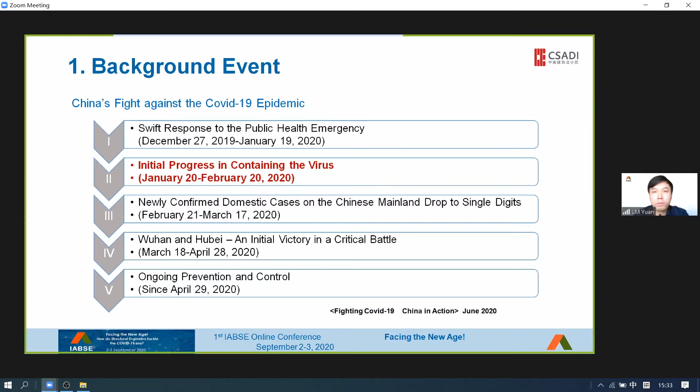The COVID-19 epidemic was first manifested in Wuhan. So where is the first city to build an emergency hospital in China? Since the outbreak of COVID-19, the number of newly infected people in Wuhan increased sharply from January 21st, and Wuhan closed the city urgently on January 23rd. At that moment, Wuhan's medical system was facing pressure to improve the reception and treatment capacity. Wuhan decided to replicate Beijing Xiaotangshan Hospital of 2003 and build emergency infectious disease hospitals, namely Huoshenshan and Leishenshan Hospital.

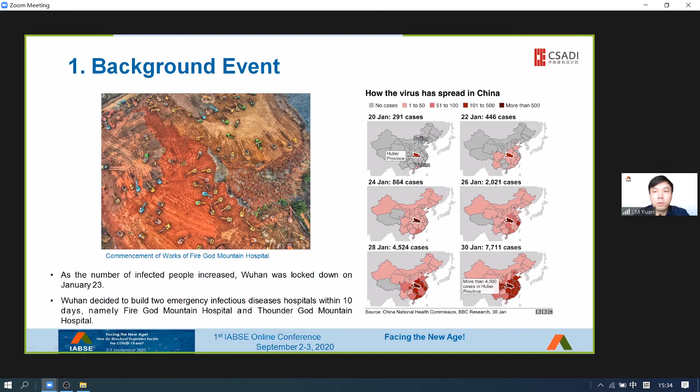On February 3rd, 2020, Wuhan Epidemic Prevention and Control Headquarters decided to implement the policy of patient classification. A total of 3 different lines of defense are deployed. The first line of defense refers to the hotels and schools that are mainly used for accommodating isolated people. The second line refers to makeshift hospitals that are mainly used for receiving and treating patients with mild symptoms. The third line refers to the temporary emergency hospitals and designated hospitals that are mainly used for receiving and treating patients with serious symptoms.

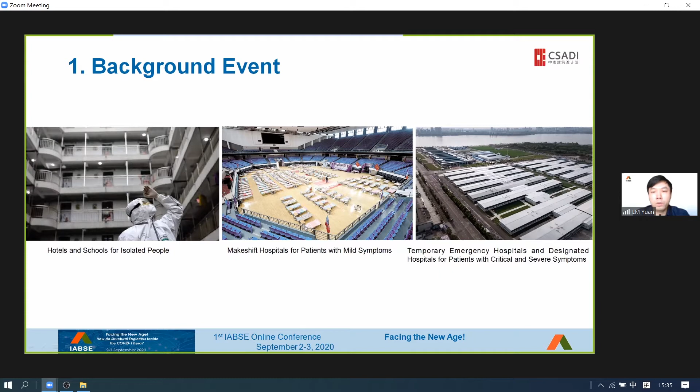With the spread of COVID-19, a large number of emergency hospitals have been built, transformed, or expanded all over the country. It's difficult to count the number of hospitals completely, but these hospitals can basically be divided into 3 categories. The first category is the temporary emergency infectious disease hospital, featuring lightweight and modular assembly. First of all, you can see the picture. Wuhan has 2 famous temporary emergency hospitals, Huoshenshan Hospital and Leishenshan Hospital, replicating the design concept of Beijing's Xiaotangshan Hospital in 2003. These 2 hospitals adopted the unitized layout and modular structure.

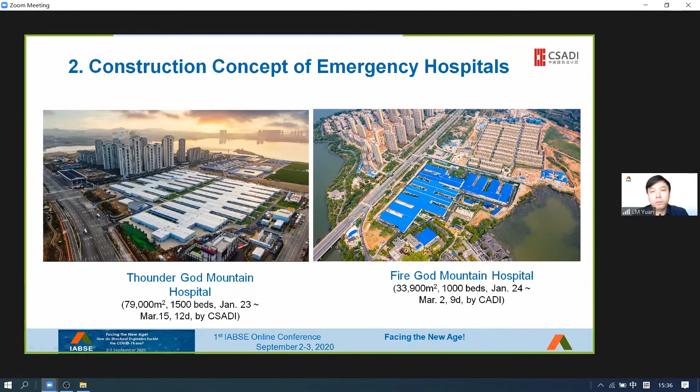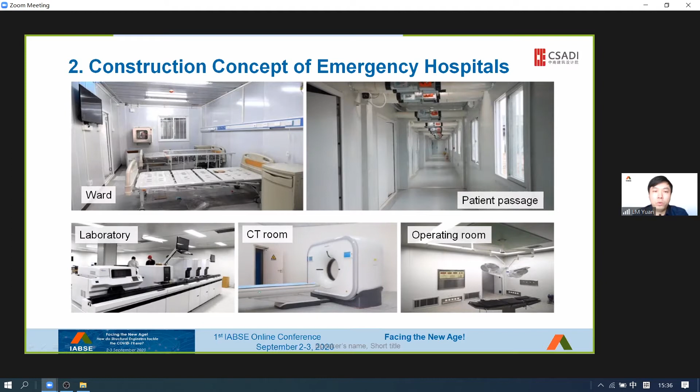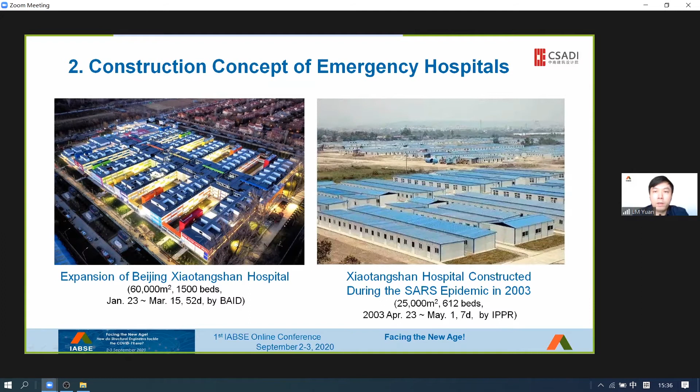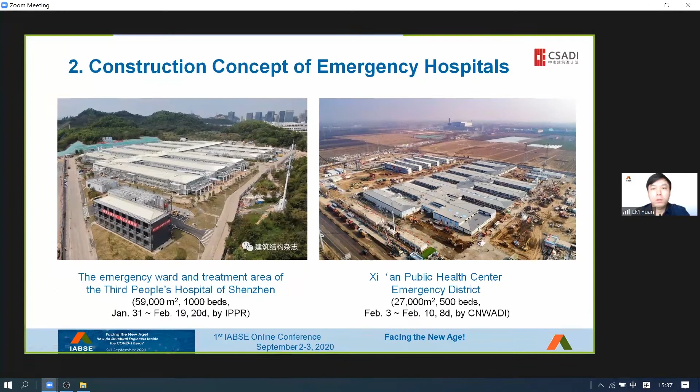These are the facilities inside the emergency hospital. We can see the ward, patient passage, laboratory, CT room, and operating room. This is the emergency hospital built on the original site of Beijing Xiaotangshan Hospital. Compared with the original conditions in 2003, we can find that great progress had been made. These are the cases from Shenzhen and Xi'an, and we can see that their forms and layouts are similar to those in Wuhan. In the process of design and construction, design institutes across the country have proposed a relatively unified layout and structure form through cooperation and exchange.

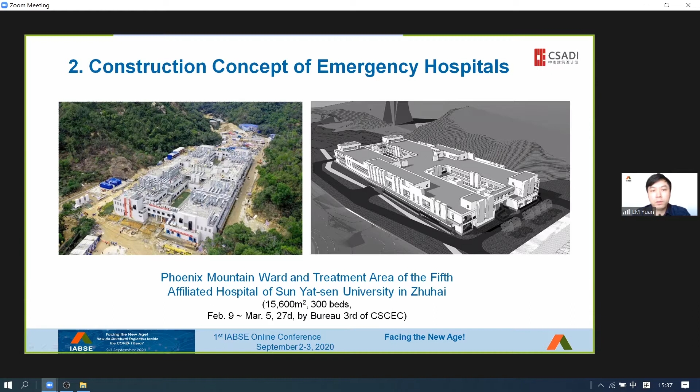Two special cases are worth mentioning. One case is that the emergency hospital in Zhuhai adopted the reinforced concrete structure for the first time. The main structure was completed in 9 days. It can be used permanently and withstand typhoons. The other one is the highly integrated container-based modular system for infectious disease hospitals. It is developed by BSB and can be built into a high-rise building and used for a long time. Its factory fabrication takes a little longer time, but the field installation is very fast.

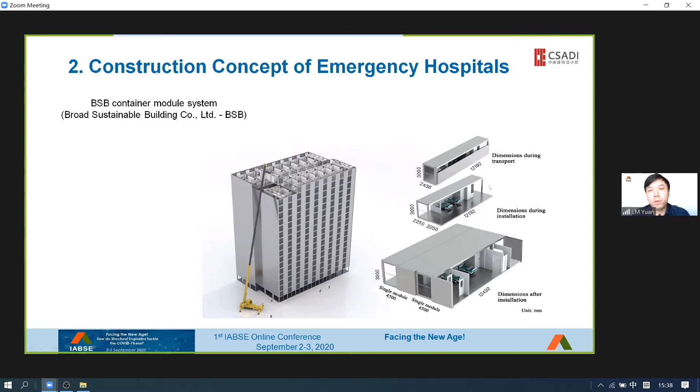The second category is the makeshift hospital, which is also known as the Fangcang shelter hospital. In response to COVID-19, China adopted the makeshift hospital for the first time. It is a large temporary hospital to separate patients with mild symptoms from their families and communities, and provide medical care, disease detection, accommodation, and social activities. It can receive and treat a large number of patients during the peak period of the epidemic, make full use of existing buildings, and transform them into temporary treatment places in the shortest time and at the lowest cost.

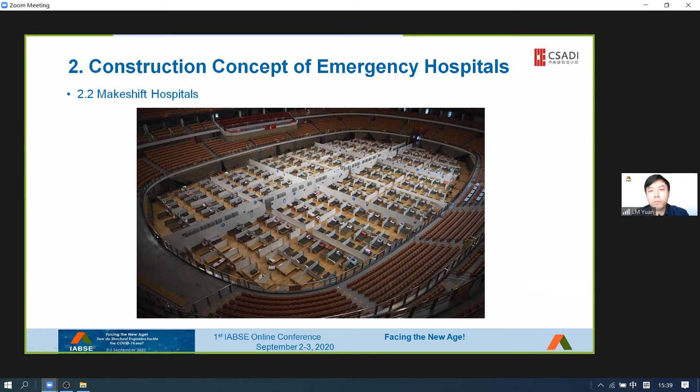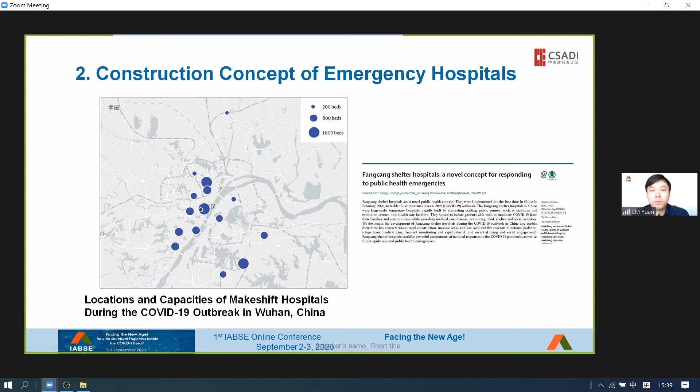This is the distribution map of some makeshift hospitals in Wuhan. The circle size is proportional to the number of hospital beds in each makeshift hospital. This diagram shows the changes of bed capacity and occupancy rates of the makeshift hospitals over time. Since February 18th, that is 12 days after the first makeshift hospital in Wuhan began to accept patients, the number of confirmed cases in Wuhan has steadily declined. So the makeshift hospital is a major reason for China's successful control of the epidemic.

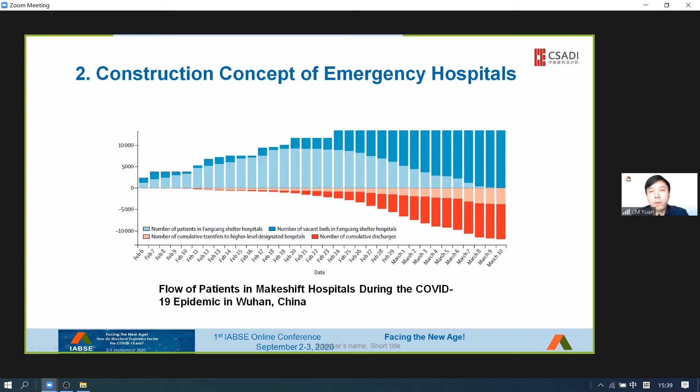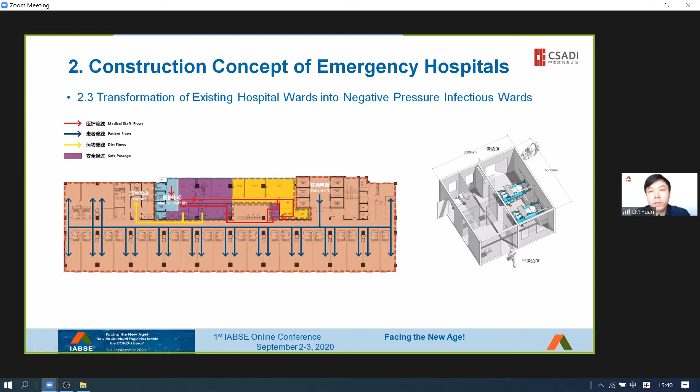In addition, the third category is the transformation of existing hospital wards. The general wards are transformed into negative pressure wards. The flow organization is adjusted, and the clean areas are separated from contaminated areas. This transformation should be completed quickly with the least change.

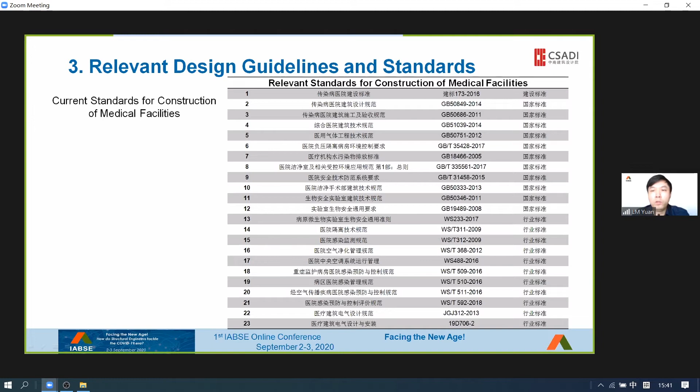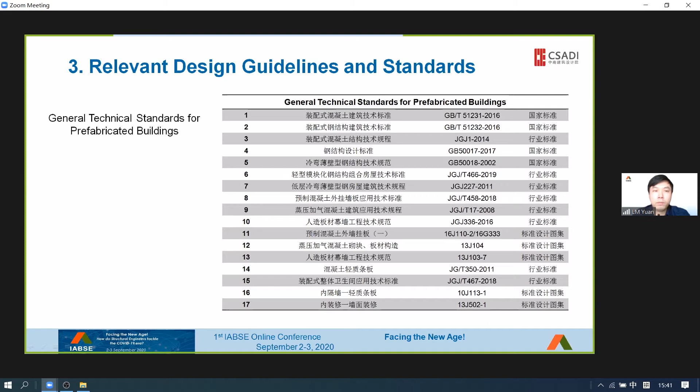Temporary emergency hospitals are suitable for prefabricated light steel structure, which makes full use of the standardization, modularization, and integration of prefabricated buildings to meet the requirements on rapid construction under the emergency. All the above are relevant specifications and standards.

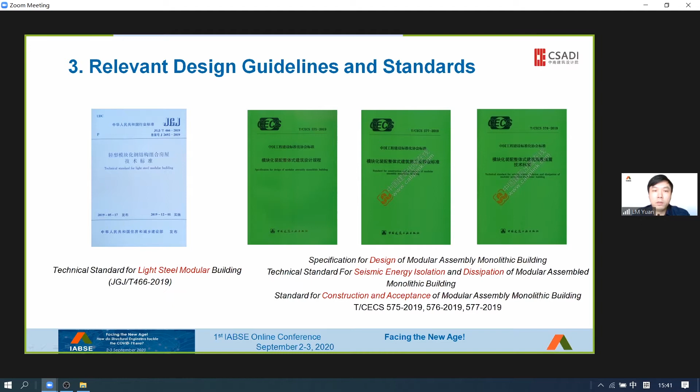During the COVID-19 epidemic, there are also many new technologies summarized, and the following standards were released at the early stage and have guiding significance. First, the design guidelines for emergency treatment facilities of novel coronavirus pneumonia, which is applicable to the reconstruction, expansion, and construction of medical facilities, and specifies construction principles and requirements of site selection, architectural design, structure, E&M, operating and maintenance.

Second, the design standard of infectious disease emergency medical facilities for novel coronavirus pneumonia, which is also applicable to the design of reconstruction, expansion, and construction. Third, the guidelines for design of temporary hospital for infectious disease, which is based on practical experience from the construction of Huoshenshan Hospital and Leishenshan Hospital.

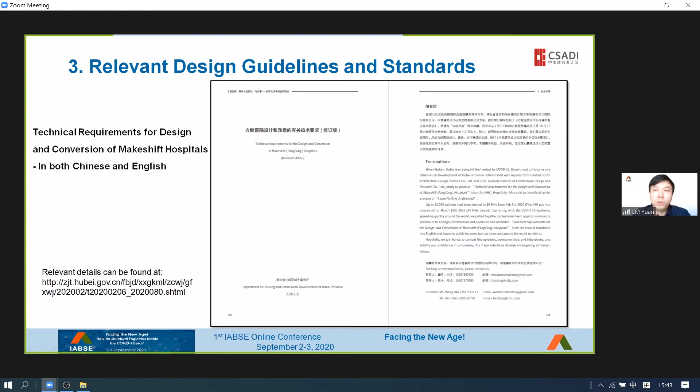Then, the technical requirements for converting hotel buildings into temporary hospitals, and the technical requirements for design and conversion of makeshift hospitals, which were released to relieve the current epidemic situation as soon as possible. The one about makeshift hospitals was translated into English and published for reference of international counterparts. Now, I will take Leishenshan Hospital as an example to explain the key points in design and construction.

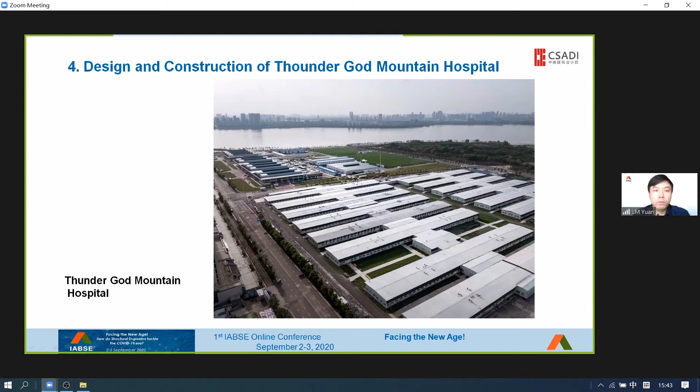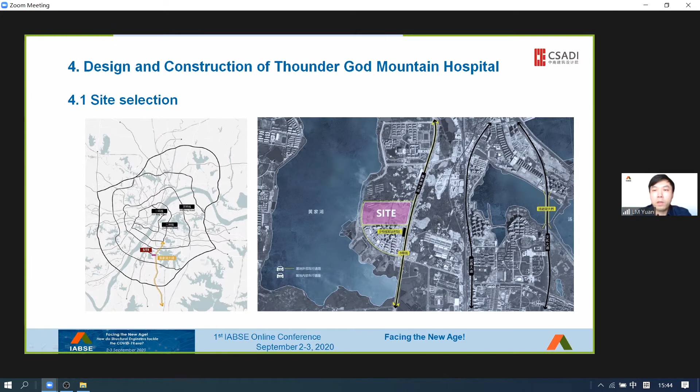First of all, we should ensure the urban environment is safe and the site selection is reasonable. The hospital is located in the south of downtown areas and at the downwind position of the city in winter. In addition, the surrounding area is broad land under development and construction without any residents. Municipal facilities are relatively complete. The site is flat and the ground is hardened, making it suitable for temporary construction. This is the master plan.

The construction land of Leishenshan Hospital covers an area of 220,000 square meters and includes east and west blocks, with a total building area of 79,000 square meters. The core area is an isolation area in the east block, which can accommodate nearly 1,500 patients. The living area for medical staff in the west block can accommodate about 2,300 staff members.

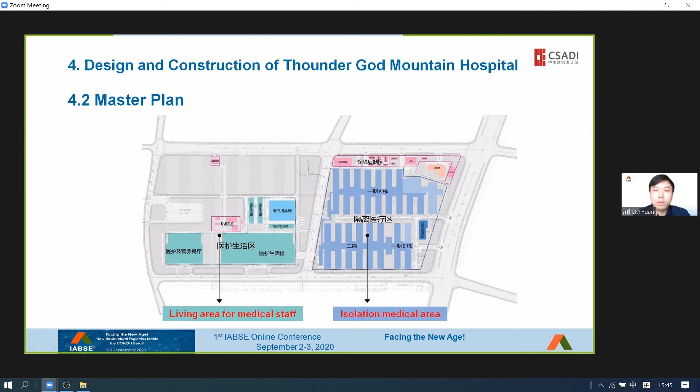This is the typical architectural layout of the isolation area. It adopts the fishbone layout, which can be flexibly adapted to the site. The layout follows the principle of three areas and dual passages for a typical infectious disease hospital. Three areas refers to the clean area, the semi-contaminated area, and the contaminated area, with safe passages provided between different areas to ensure the safety of medical staff.

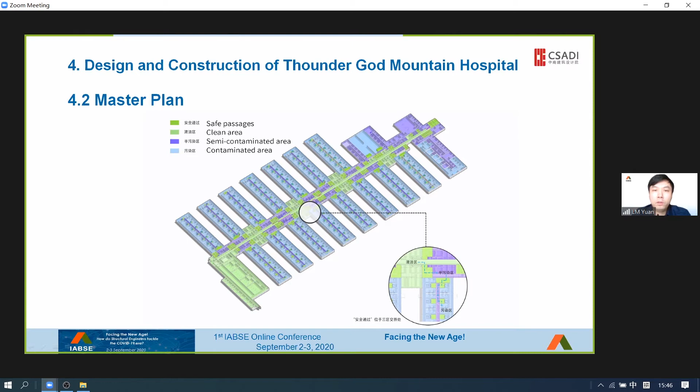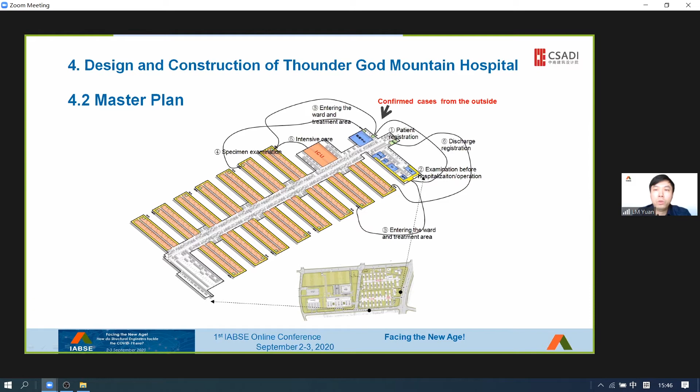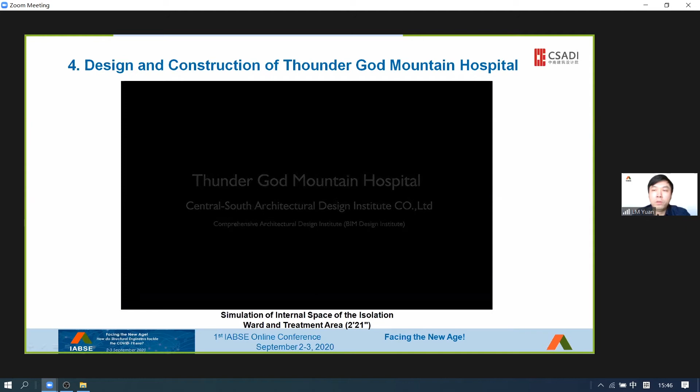Dual passages refer to the patient passage and the medical staff passage. The patients may enter directly from the outside. Each ward and treatment area is relatively independent to prevent cross-infection. Next, I will show you a video of BIM simulation. This video demonstrates the inner space of the ward and the treatment area, and shows the inflow and outflow of medical staff.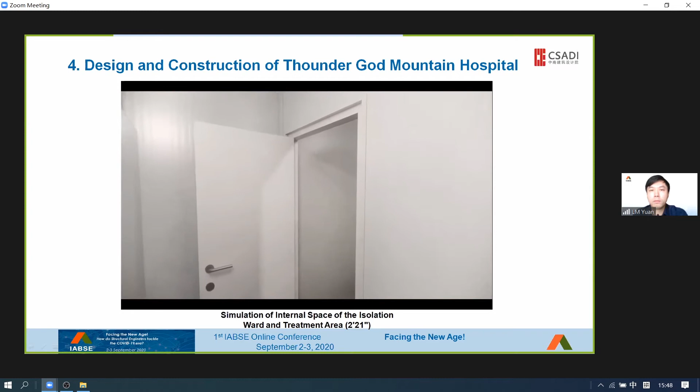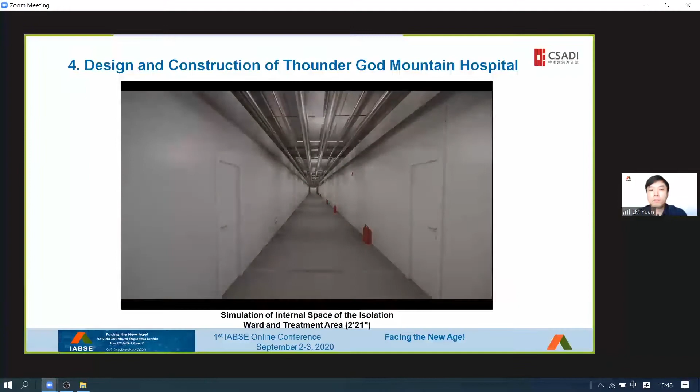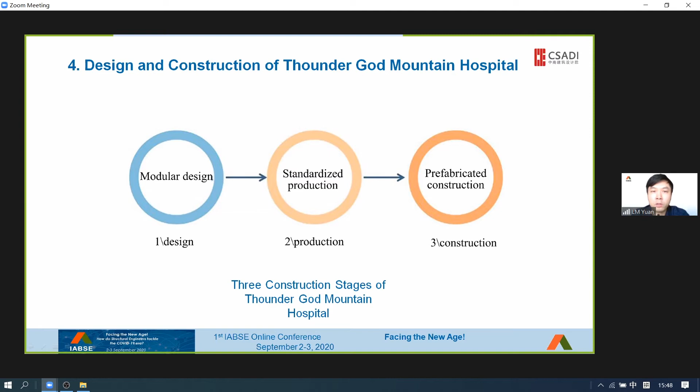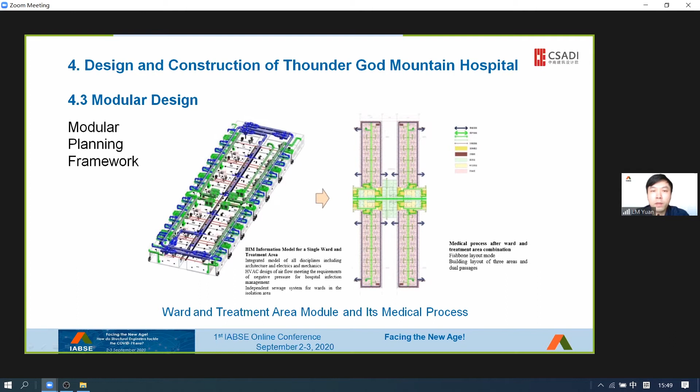Okay. Leishenshan Hospital is constructed in these three stages: the modular design, standard production, and the prefabricated construction. First of all, let's take a look at modular design. The ward module is a major functional area. Each ward module has 50 beds. All ward modules have universal and consistent design. The three basic functional modules are assembled into 30 wards as per unified internal standard.

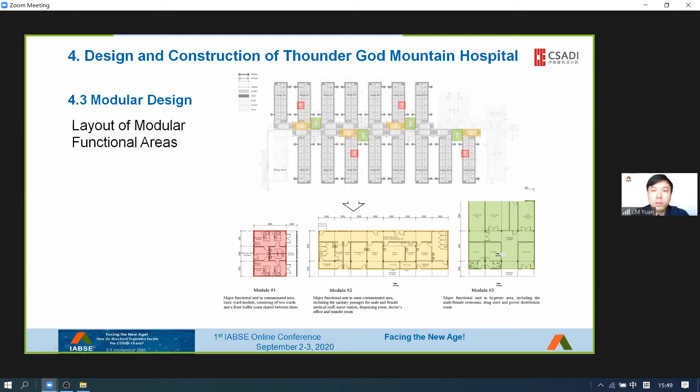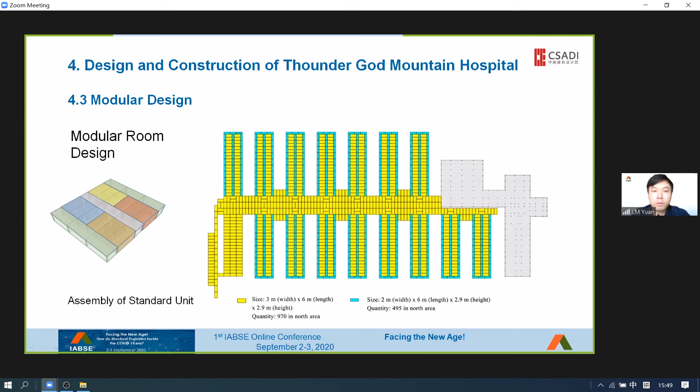To achieve standard production, the whole isolation ward and treatment area is divided into two box-type modules of different size. The yellow ones with a plan size of 3 meters times 6 meters, and the blue ones with a plan size of 2 meters times 6 meters. On the basis of modular design, different parts and components are produced in a standard manner. When workers are treating the ground and burying pipelines on the site, over 10 factories across the country have already started the module fabrication. Most building materials of the hospital are prefabricated in factory. They are all produced in a standard and industrialized manner.

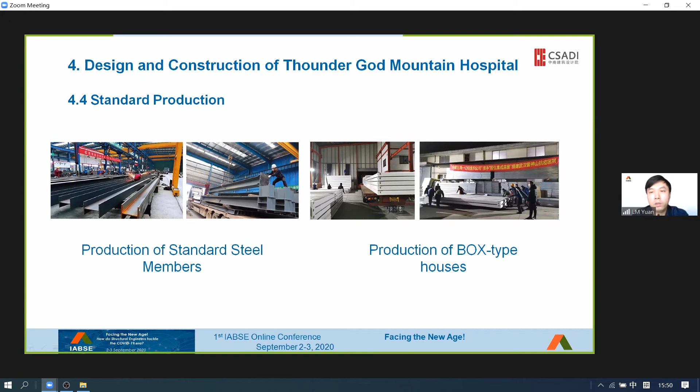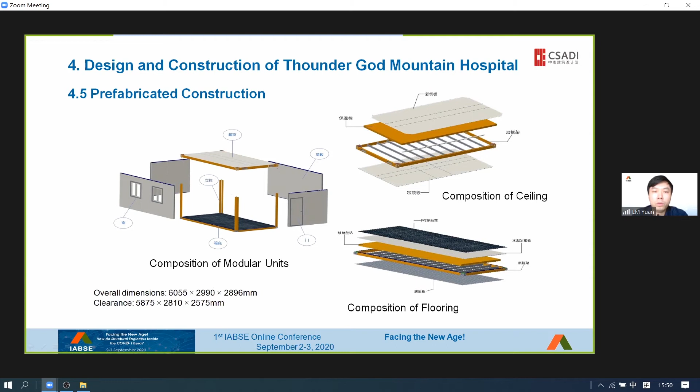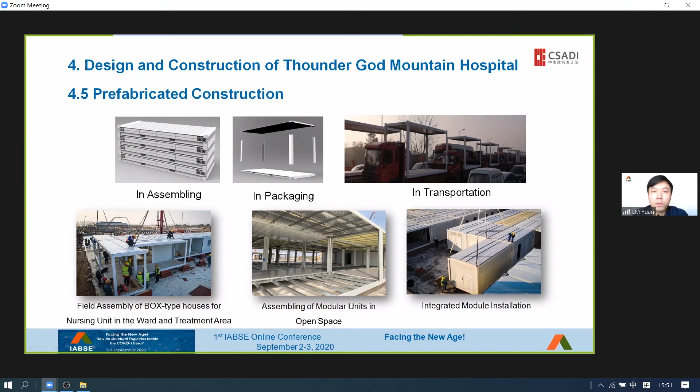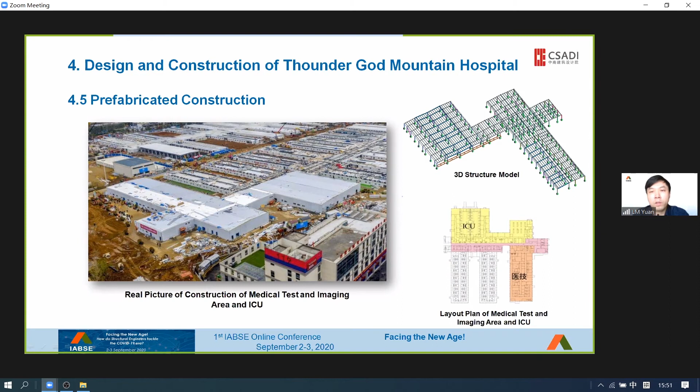The medical technology zone mainly includes ICU, CT room, operating room, and so on. These function rooms need large span and height, and the column grids are not unified. The steel frame structure is used because it's difficult for container house to meet the requirements. In the design process, a detailed model is directly established to facilitate the rapid construction, and the structural checking and the detailed design are carried out at the same time. With this approach, the process from design to drawing is shortened to 24 hours. The steel structural members are cut and fabricated and immediately transported to the site for assembly.

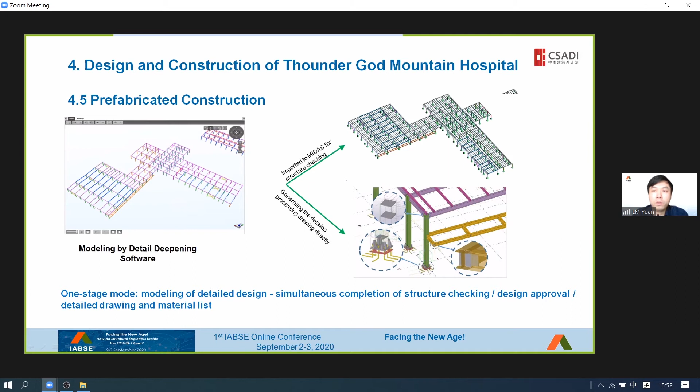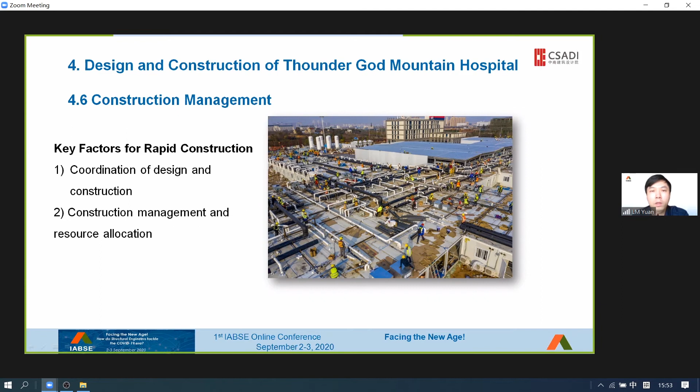Next, I will introduce how to achieve rapid construction from the perspective of construction management. The rapid construction requires two key factors. The first is coordination of design and construction, and the second is construction management and resource allocation.

Good coordination of design and construction requires, first of all, the integrated project management concept, that is to take the EPC mode as a reference and consider design issues from the perspective of construction and procurement. It's necessary to use the existing resources of construction contractors and adopt the existing materials. The design scheme should be proposed on the basis of full awareness of construction conditions and status on the site. If the conditions change and make it hard to implement the original design, the scheme should be timely adjusted.

Secondly, it's necessary to arrange different design processes seamlessly and coordinate with the construction. Thirdly, the well-adapted and flexible structural form should be selected. Moreover, the structural form should be simple, reliable, and convenient for fabrication and installation. In addition, the on-site design and effective communication are also indispensable. The quality and safety risk should also be controlled during the construction and coordinated with the acceptance inspection.

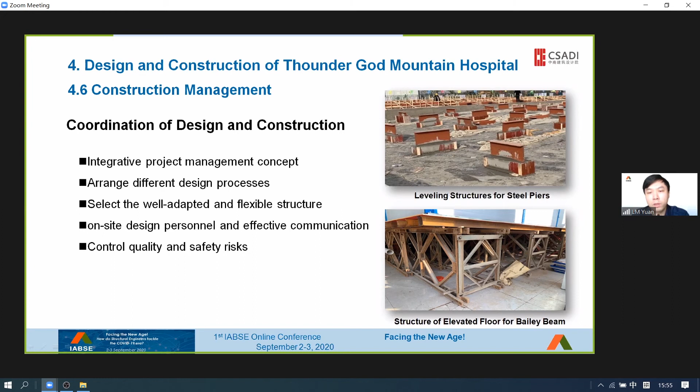The site and foundation are main factors that restrict the construction period. To start construction as soon as possible, the design should utilize the original hardened ground as much as possible. The area lacking hardened ground should be poured with a thick concrete hardened layer and provided with built-in steel mesh. The hardened ground should be integrated into a whole and provided with piers or rafts according to the superstructure. This method can not only solve the problem of crushing for the foundation, but also provide good conditions for laying HDPE waterproof membranes over the whole site.

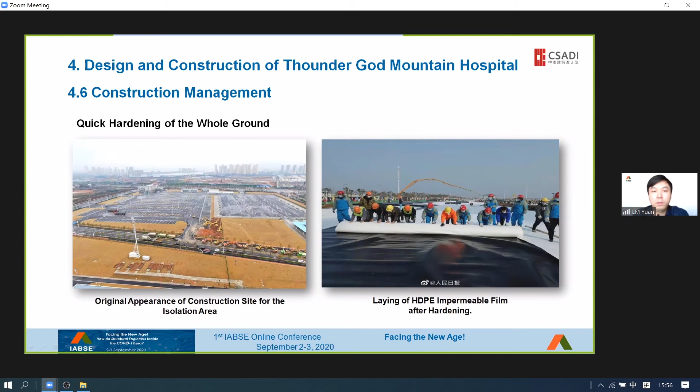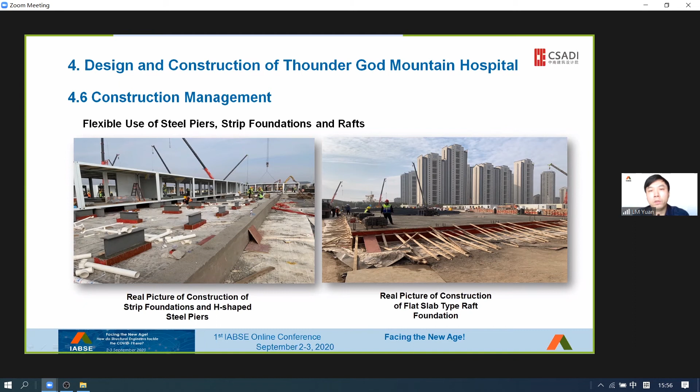The container house is lightweight, and the hardened ground can bear the load from it directly. It's elevated to a certain height by piers to ensure the installation space for drainage pipelines. Meanwhile, rafts should be adopted in the steel frame area. We can find from the figure that strip-shaped concrete piers are arranged along the outside of the buildings to support the superstructure and block the backfilling soil. And H-shaped steel piers are used inside.

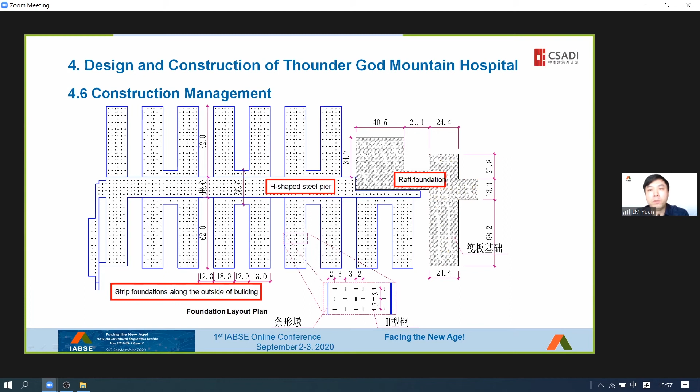There are 5 difficulties to overcome about construction management. First, to cope with the limited construction period, it is necessary to formulate a detailed implementation plan and improve the management, increase inputs of labor, materials, and equipment, and arrange working procedures reasonably. As for quality control, the on-site personnel should be arranged at any time to enhance the quality management. It's also important to decompose the quality objectives and guide the workers with samples.

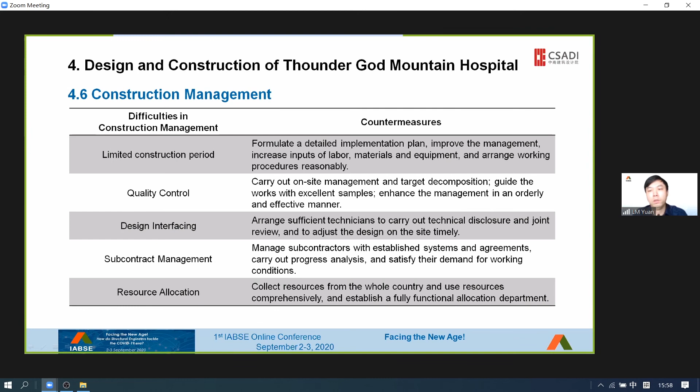Third, be equipped with sufficient construction technicians to improve the design, conduct the technical review, and adjust the design in time according to the site conditions. Fourth, subcontractors should be managed by established systems and agreements, and should be subject to progress analysis. In addition, their working requirements should be satisfied. Finally, as for resource allocation, it's necessary to establish a well-functioning allocation department to ensure that the resources are fully utilized and mobilized throughout the country due to the lockdown during COVID-19.

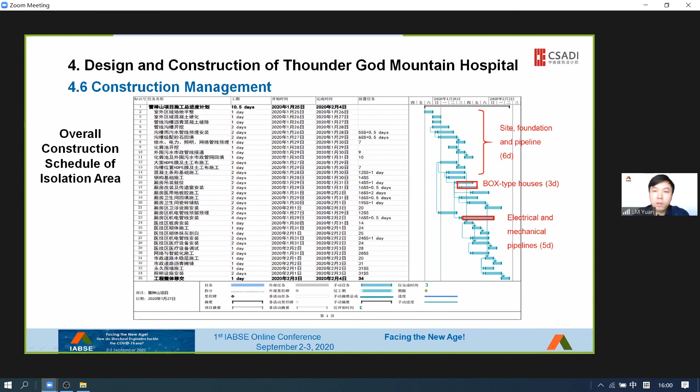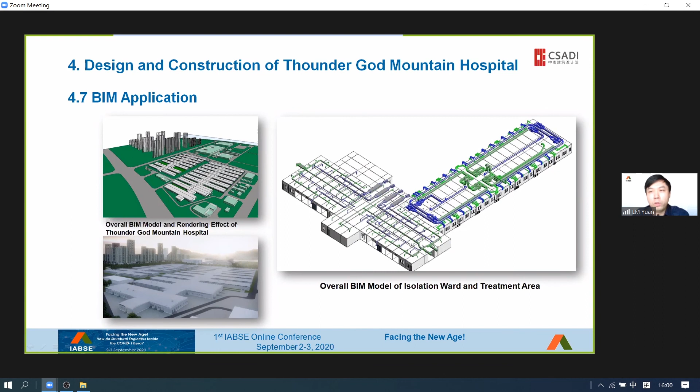In the future, key functional modules, such as the negative pressure ward unit for infectious disease hospitals, can be developed and manufactured in a standard manner. During the construction of Leishenshan Hospital, BIM technology, digital simulation, and prefabricated construction technology are adopted. On the one hand, they can avoid the collision of electrical and mechanical pipelines. On the other hand, they're also used to digitally simulate the on-site construction procedures to guide the installation of module components, optimize the assembly scheme, and improve the efficiency.

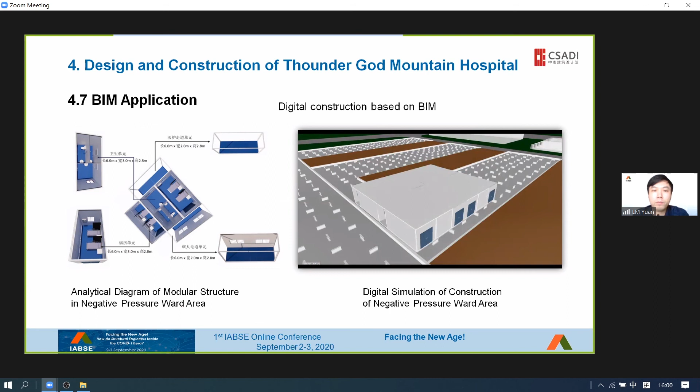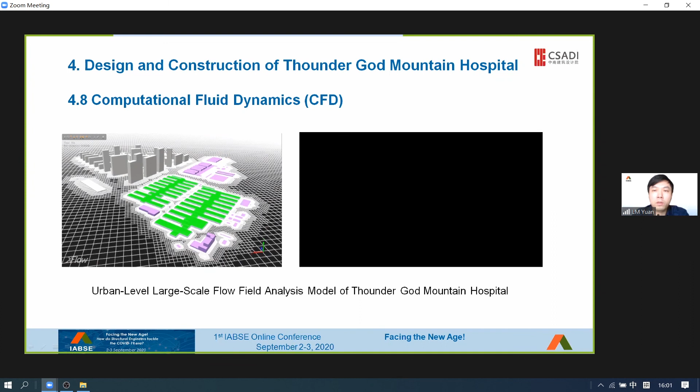We have also adopted CFD simulation technology, established a large-scale city-class flow field model, and simulated the influence of exhaust emission outside the hospital on the surrounding environment, which provides the basis for the overall planning and design of the hospital, considering the health and safety of medical staff, patients, and the public. The analysis of air distribution in the negative pressure ward aims to find the best scheme for air supply and exhaust, thereby facilitating the rapid circulation and exhaust of contaminated air and reducing the risk of cross-infection.

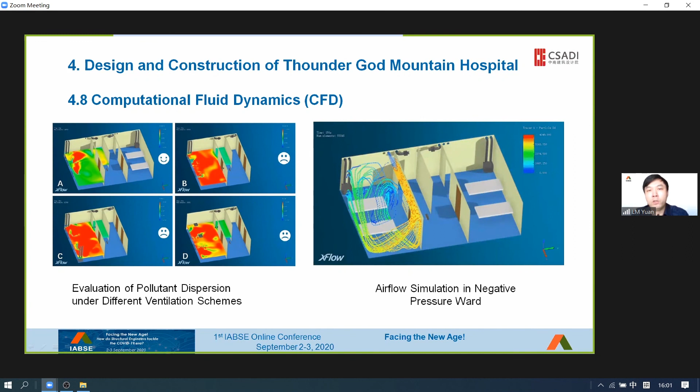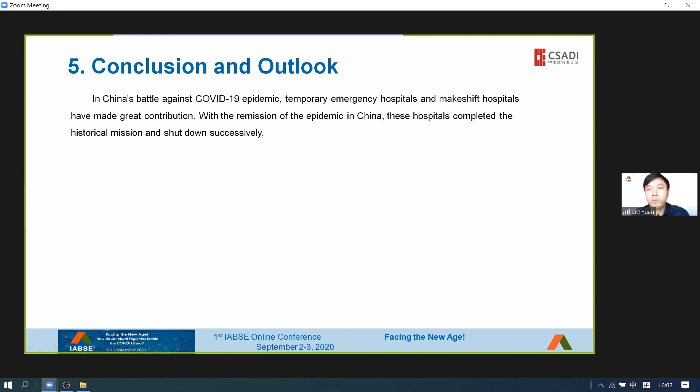Finally, I'd like to make a conclusion to this presentation. In the battle against the COVID-19 epidemic, temporary emergency hospitals and makeshift hospitals have made great contributions. With the remission of the epidemic in China, these hospitals completed their historical mission and shut down successively. The rapid construction of temporary emergency hospitals benefits from the concept of modular and prefabricated construction, and the collaborative management and resource integration capability.

The modular and prefabricated construction system has irreplaceable application value and enormous development space. In the future, various modules will be developed to satisfy different function demands of medical facilities. And the integration of E&M will also be improved. In the meantime, the experience of makeshift hospital conversion reminds us that the design of public buildings should not only satisfy the requirements for normal use, but also meet the demands in the epidemic period and keep sufficient conditions for emergencies.